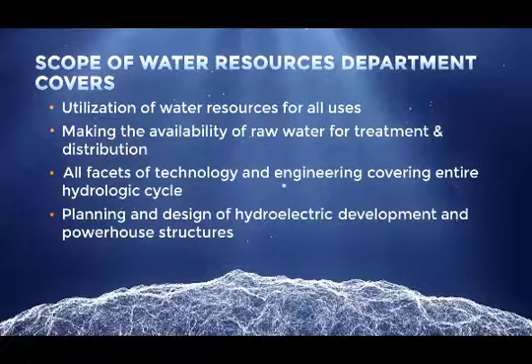Let's first hear from Mr. R.K. Jain, who is also holding the post of Chairman CWC. He will acquaint us with the importance of setting standards in this domain.

Standardization is very important for not only bringing uniformity in the procedures but also to have quality control. I congratulate BIS for striving hard in formulating the standards and covering almost all the aspects of the water resources.

It is very important for any country to have its own standards, particularly in the field of water resources, depending upon local geography and other local conditions.

Subject of water resources covers aspects like irrigation, drinking water, water for industrial use, planning and design of water resources projects, interstate issues, environmental issues, etc.

Standards are needed for wholesome and organized development of any nation and also to resolve conflicts.

There are 18 sectional committees in the Water Resources Division Council, WRDC in short. These committees are playing a vital role in this endeavor of BIS.

WRDC advises the new subject areas to be taken up for formulation of standards, keeping in view the national needs and priorities. It also advises on the matters relating to R&D needed for the establishment of the standards or their revision. Let us hear from a senior BIS official on how standards are developed and the overall working of the technical committees.

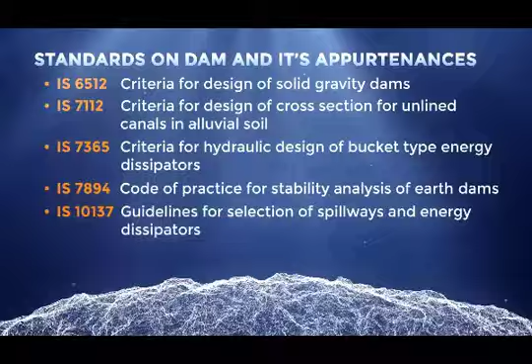Surface water resources is a big focus area. Within that, we work on dams and its appurtenances such as spillways, weirs, gates, etc. We also work on reservoirs, lakes and canals.

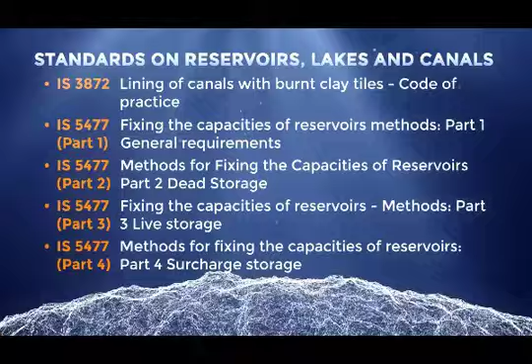Instrumentation of hydraulic structures and geological investigations. Another important category pertains to river training works, covering structures like embankments, groins, revetments, etc. Lastly, we deal with standards on management of water resources projects.

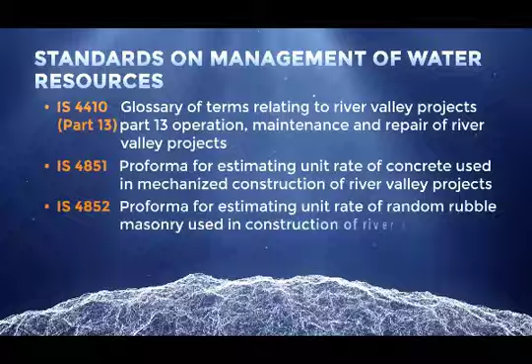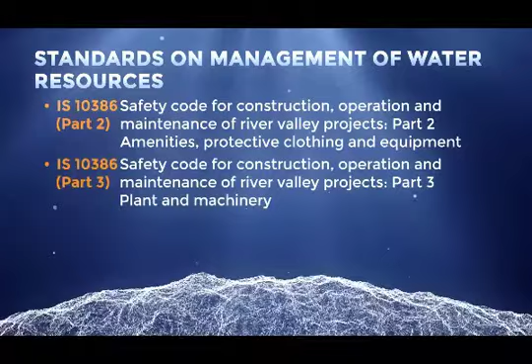Here we developed standards such as progress report and completion report of river valley projects. We also formulate safety codes in construction, operation and maintenance of river valley projects. Beyond this, we also work on subjects such as estimating unit rate for civil works, etc.

Now that we know the functional aspects of how the technical committees operate, let's take a closer look at their areas of operation. Dams, barrages and weirs are man-made barrier structures built across a stream or a river that stops and regulates the flow of water in controlled fashion.

Indian standards ensure that dams built in India are safe, economical and durable and are fit and functional to serve the nation. Let's hear about this in detail from our expert.

Let's talk about the Indian standards for dams and canals in our country. IS 6512 - this is one of the important standards which gives the design criteria for any solid gravity dam. Design analysis is a crucial part for any dam before its construction.

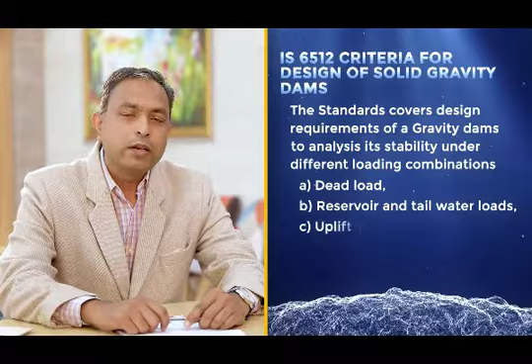We understand that this stability analysis takes into account the several critical load combinations. The standard gives 7 different load combinations for it. They are mainly the dead load, reservoir and tailwater loads, uplift pressure, earthquake forces, earth and silt pressure, ice pressure, wind pressure, wave pressure and thermal loads.

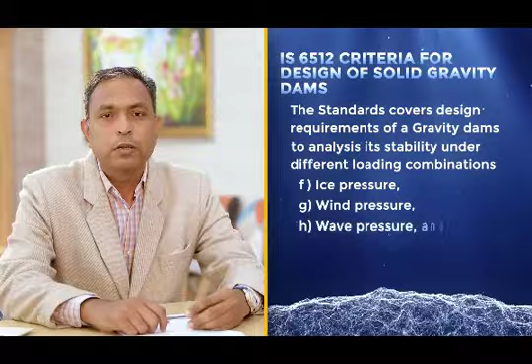We have one more important standard, IS 11855. This is design and use of rubber seals for hydraulic gates. This standard gives the recommendations. The standard covers 6 different types of seals depending upon their shapes, namely angle-shaped seal, flat seal, music note seal, double caisson seals, double bulb seals and corner seals.

It also lays out 6 important parameters to control the quality checks, comprising of tensile and elongation test, shore hardness test, water absorption, weather impact test and its materials.

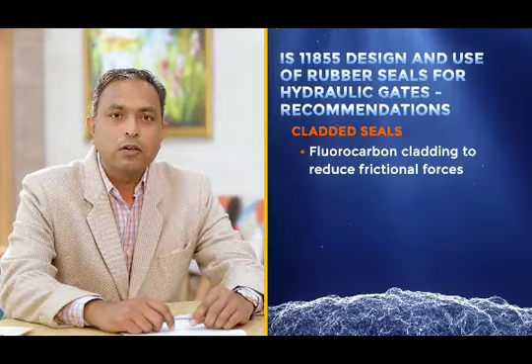The standard also covers an important requirement of cladded seals. The cladded seals use fluorocarbon cladding to reduce frictional forces. The standard also gives the test requirements of adhesion test.

Dams also need to have certain appurtenant structures to enable them to discharge their operational functions safely and effectively. A number of standards are in place to ensure this.

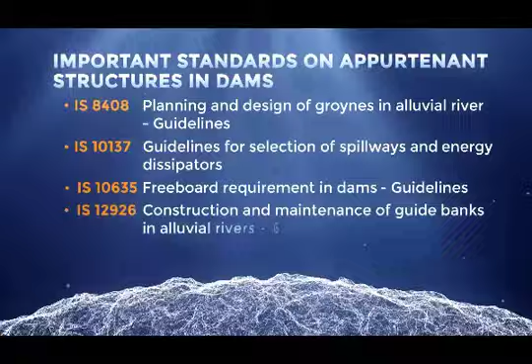For instance, this is a spillway. Spillways are passages for letting out water safely when the reservoir overflows. IS 5186 and IS 6934 cover the design criteria for different types of spillways.

Dam as a structure is not alone; we have many more standards on appurtenant structures. IS 11527 is a standard that deals with the structural design of energy dissipators for spillways. Energy dissipators are important structures to protect against erosion on the downstream part of any dam or spillway.

The design of downstream protection works, or energy dissipators below hydraulic structures, occupies a vital place in the design and construction of dams, barrages and outlets. The standard covers hydraulic jump type, stilling basin and bucket type energy dissipators below spillways and outlet works founded on rock.

In the standard, the structural design of floor slabs consists of the following steps: determination of uplift forces, details of anchorages into bedrock—that is, diameter, number and spacing of anchor bars—determination of the length considering dislodgement of rock mass against uplift force, and working out details of slab reinforcement.

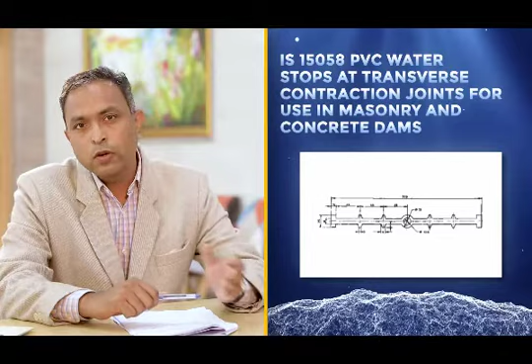IS 15058 is another standard, on PVC water stops. These water stops are used at transverse contraction joints for use in masonry and concrete dams. The contraction joints in masonry and concrete dams provide passage through the dam which, unless sealed, would permit leakage from the reservoir to the downstream face, and this could be harmful to the structure.

To check this leakage, water stops are installed in the joints adjacent to the upstream face. The standard takes care of the quality of this product and covers 12 different parameters to check the quality, from material, aging, weather impact, weight, water absorption and its dimensions. The standard is BIS certifiable, and presently we have 6 BIS licenses against this standard.

Water release from dams may also be controlled using gates and shutters. The Bureau of Indian Standards Code IS 13623, criteria for choice of gates and hoists, provides the basic classification of gates. IS 5620 gives recommendations for structural design criteria for low-head slide gates.

BIS has developed a vast array of Indian standards for planning, design, construction and maintenance of various types of dams and their components. Before we move on to the next category, let's take a brief look at some key standards within this area.

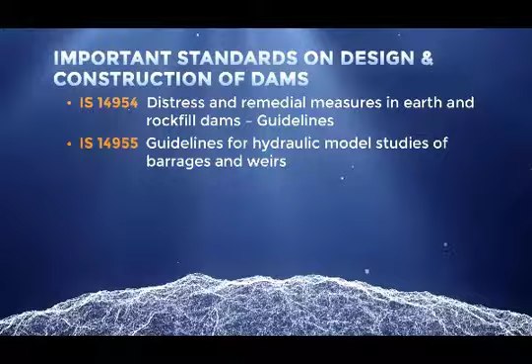Now, for our next subcategory under surface water, is reservoirs and lakes. A reservoir is a man-made lake that is created when a dam is built on a river. They are different from natural lakes. River water gets blocked by dams and is collected behind the dam, creating a reservoir.

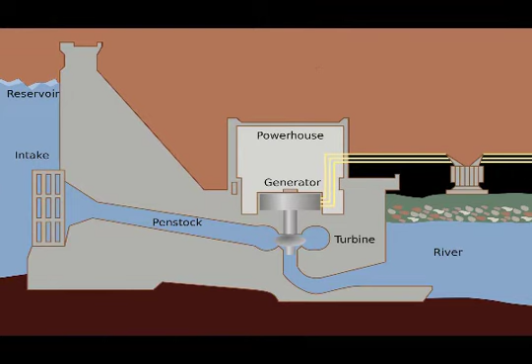We already know reservoirs are used to generate hydropower. They also have a host of other benefits. First, during seasonal high flow of rivers, they limit the amount of water allowed to continue downstream. Through this, reservoirs help control flooding.

Secondly, during dry seasons, water is released from the reservoir through canals. This enables farmers to water their crops and industries to function without interruption.

Do you know what's the most common problem with reservoirs? You might not want to believe it, but it's as simple as evaporation. A huge quantity of water is lost from reservoirs through evaporation. However, a substantial quantity of water can be conserved by controlling this evaporation.

We have a standard, IS 14654, minimizing evaporation losses from reservoirs, which stipulates the methods and guidelines for reduction of evaporation losses from water bodies, with special reference to control of evaporation with chemical retardants. IS 6939 is another standard that provides methods for determination of evaporation from reservoirs.

The BIS standard also covers other measures available for control of evaporation, like the installation of floating solar panels on the reservoir. If you go to any reservoir or even a natural lake, you will observe that the water there is very still. Due to this, bits of sand, rock, dirt and other material called sediment sink to the bottom, leaving the water quite clear.

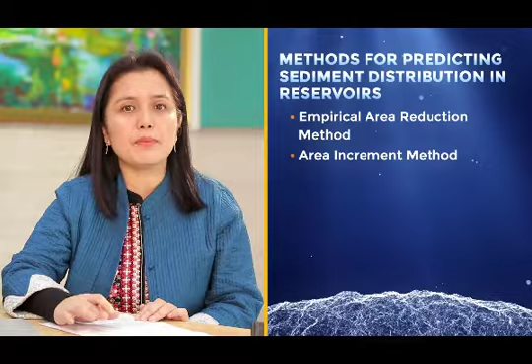The sediment entering a storage reservoir gets deposited progressively with the passage of time. This causes the bed level near the dam to rise and reduces the capacity of the reservoir. Several methods are in use for predicting sediment distribution in reservoirs for design purposes. Either the empirical area reduction method or the area increment method may be used. IS 5477 Part 2 lays down methods for computing the sediment yield and for predicting the probable sediment distribution in the reservoir. Let's hear about this in detail from our expert.

IIT Roorkee, since its earlier version as University of Roorkee, has been involved in the planning, design and construction related activities of major water resources projects such as Bhakra Dam, Hirakud Dam and Tehri Dam in the country. Research inputs from academic and research institutions are appropriately incorporated in the Indian standards and guidelines prepared by Bureau of Indian Standards, and are at par with international standards. Government of India has focused on river rejuvenation, water conservation and water reuse. Thus, there is a need of revisiting the existing standards and introducing new standards to meet such requirements for the health of existing water bodies and availability of safe water.

Water from reservoirs and barrages is released through canals, which have an important role to play in India's rural economy. This released water is further utilized for irrigation in far-flung areas. BIS has developed the standard IS 6531, which gives design requirements for canal head regulators. IS 9447 gives guidelines for assessment of seepage losses in canals. IS 4701 is a standard for earthwork on canals. Standards have also been framed to address various kinds of seepage losses in canals through various types of surface lining such as stone pitching, concrete slabs and tiles, burnt clay tiles, bitumen lining and polyethylene films. Here is a list of some important standards.

Let's hear about this in detail from our expert. We have another important part of our water resource sector: canals. Canals are the major source of irrigation in our country. Apart from design, layout and planning of canals, a number of standards have been framed on lining of canals. Let's talk about a few of them.

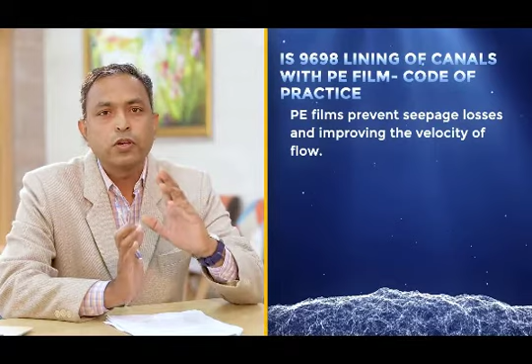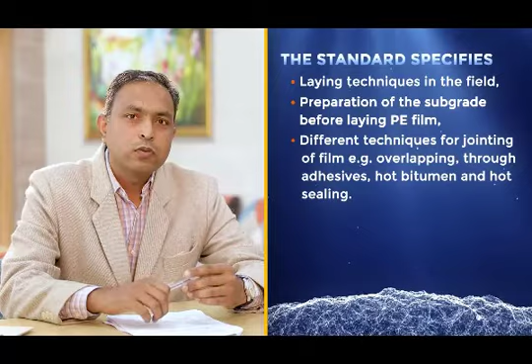IS 9698 is one of the important standards which gives lining of canals with PE films, that is polyethylene films. The standard lays down the practice for use of PE film as canal lining, preventing seepage losses and improving the velocity of flow. The standard covers both the low density type and high density type PE films according to the requirements of IS 2508 and IS 10889. The standard specifies laying techniques in the field, preparation of the subgrade before laying the PE film, and different techniques for jointing of films, for example overlapping through adhesive, hot bitumen and hot sealing. It also guides us with do's and don'ts in the use of this PE film as canal lining.

We have one more important standard, IS 10646. This standard deals with canal lining of cement concrete tiles and is BIS certifiable for cement concrete tiles as canal lining. It gives material requirements for tiles, with reference to the use of different cement and requirements for aggregates conforming to IS 383. The standard specifies the dimensions of tiles and gives the test to check the quality of tiles through its flexure test. The flexure test gives the minimum breaking load requirement from 18 to 41 kg for different thicknesses.

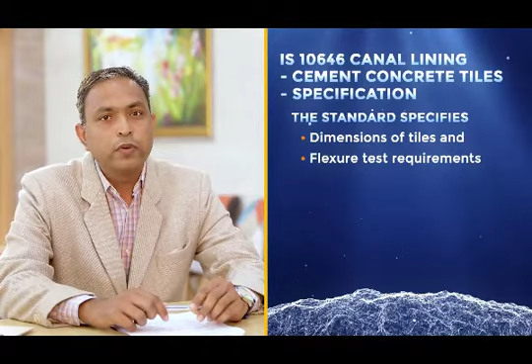Now for hydrometry, another emerging and critical area. BIS has also developed a number of standards in this domain in terms of measurement of liquid flow and discharge in open channels and closed conduits by various methods. Here is a list of some important standards.

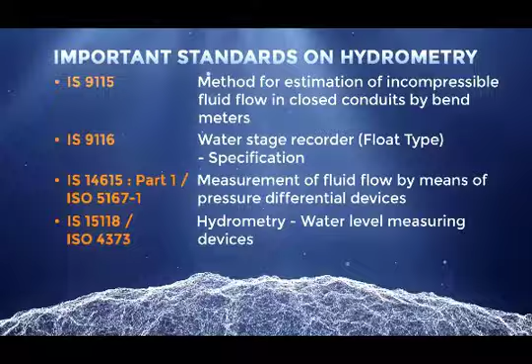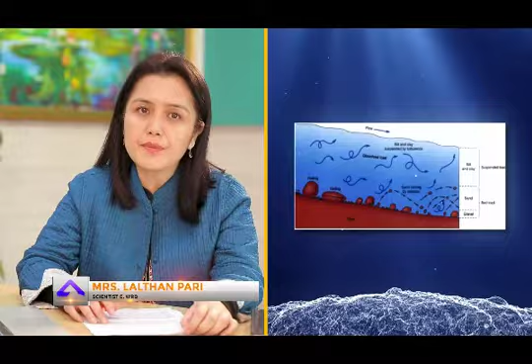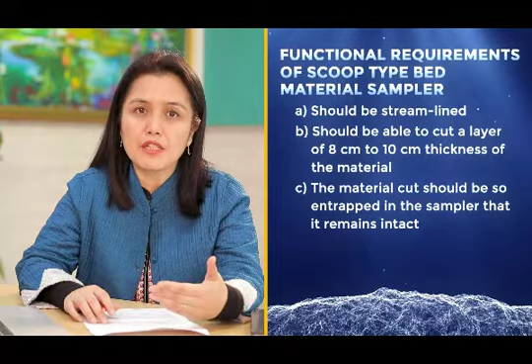Insoluble materials like silt, sand and gravel transported by streams create problems in the operation of many river valley projects. Therefore, to have adequate knowledge of the movement of sediments, systematic sampling of sediment is required. IS 3917, scoop type bed material samplers, is a standard that specifies functional requirements like the sampler should be able to cut a layer of 8 cm to 10 cm thickness. It also specifies performance test requirements and materials to be used for the manufacture of various parts of the sampler. Other important standards under hydrometry include IS 16571, measurement of liquid flow in open channels.

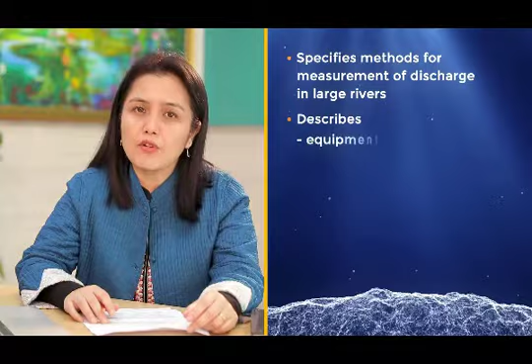This standard specifies methods for measurement of discharge in large rivers using the moving boat method. The standard describes equipment requirements, selection of site, method of computation, and also contains a step-by-step example computation by the moving boat method.

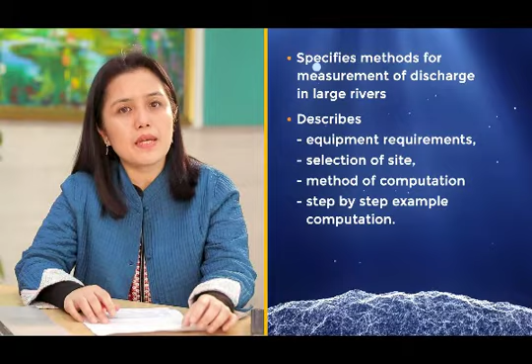IS 16138 is a standard which gives guidelines for the design, selection, and use of electromagnetic current meters for measurement of liquid velocity in open channels.

BIS has also taken an active role in the ISO committees in the field of hydrometry. Let's get more clarity on this subject matter from our expert.

BIS is working in close liaison with ISO in the area of standardization on hydrometry. BIS holds the secretariat of the committee ISO TC 113 on hydrometry and its subcommittees SC1 velocity area methods and SC6 sediment transport since the inception of the committee in the year 1964. Indian experts actively contribute in the formulation of ISO standards on hydrometry and hold prominent leadership positions such as chair, convener, and project leaders. BIS has adopted many ISO standards on hydrometry to align with the latest technologies as well.

Currently, India is going through a severe groundwater crisis. This is largely due to severe over-extraction and groundwater contamination, covering nearly 60% of all districts in India. Besides, recharge of groundwater is slow as a large quantity of surface runoff gets washed to rivers and oceans.

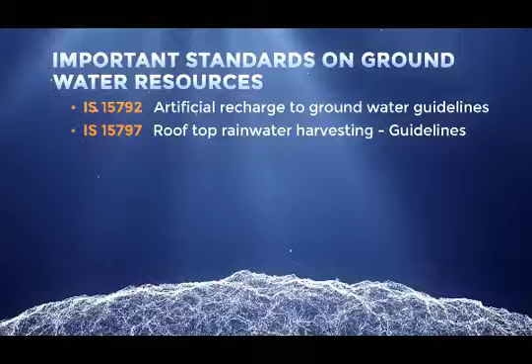Excessive use of groundwater for various applications has resulted in lowering of groundwater levels, causing adverse environmental impacts. Artificial recharge to groundwater refers to augmentation of groundwater resources using surplus surface water available. In this regard, there is a standard IS 15792, Artificial Recharge to Groundwater, that provides various techniques and methods of artificial recharge by modifying the natural movement of the surface water.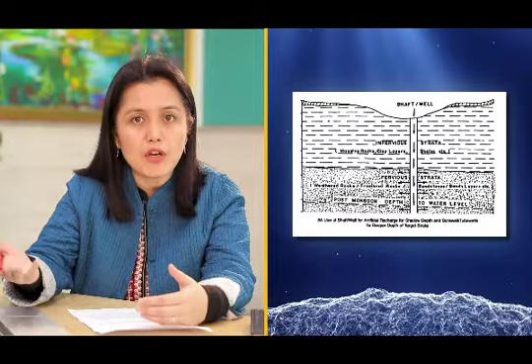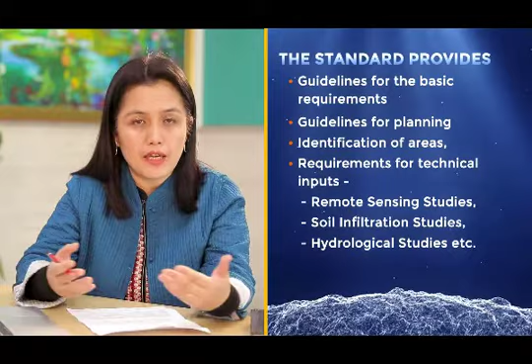The standard provides guidelines for the basic requirements for artificial recharge projects and its planning, such as identification of the areas, requirements for technical inputs like remote sensing studies, soil infiltration studies, hydrological studies, etc.

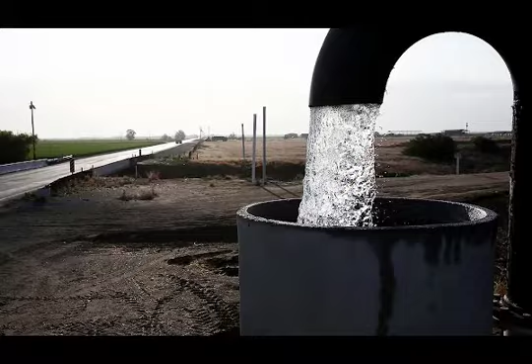In terms of groundwater resources, there are many other important areas where BIS has developed standards, like IS 15797, guidelines for rooftop rainwater harvesting, and IS 15897, which provides the specifics of surface geophysical surveys for hydrogeological studies. For a detailed list, please check the program of work under WRD 3, Groundwater and Related Investigations Sectional Committee.

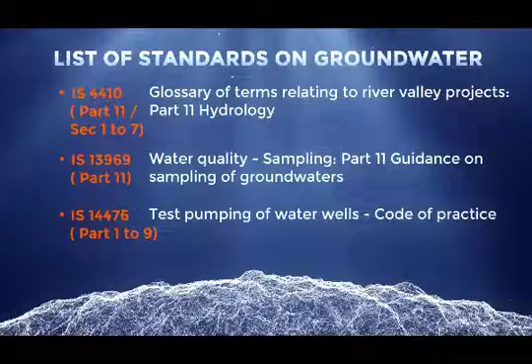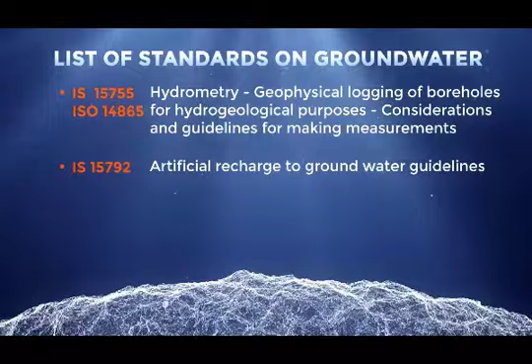India is the largest user of groundwater in the world. About one-fourth of the global groundwater withdrawal occurs in India. Hence, there is a dire necessity to standardize the methods and procedures for survey, assessment, monitoring, and management of groundwater.

Standards provide technical specifications, enabling guidelines, and precise criteria for the activities. Standards also help to reduce errors, facilitate problem solving, and increase the reliability and effectiveness of outputs. Standards in some aspects of groundwater like geophysics, artificial recharge, and groundwater measurement have already been developed by BIS.

A few new subjects have also been taken up for standardization. Just to mention a few: guidelines for aquifer mapping, mathematical modeling of groundwater, impact assessment techniques for artificial recharge schemes, interaction of groundwater and surface water assessment, guidelines for surface runoff harvesting using small structures. These standards will help in a long way to achieve the desired results in the groundwater sector.

Evidently, these water resources projects demand meticulous planning before execution. This is to make sure that adverse impacts do not outweigh the benefits expected from the projects.

To address this, BIS has developed standards IS 15845 and IS 15442 for environment management plan and parameters for environmental impact assessment of water resource projects. Here is the list of some important standards.

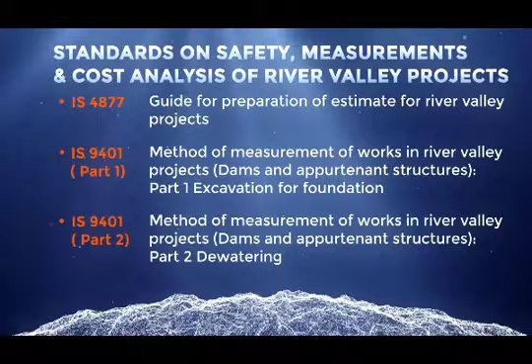Outbreak of fire in river valley projects can cause extensive damages to the buildings and equipment. For this, we have IS 10386, Construction, Operation and Maintenance of River Valley Projects, Part 7, Fire Safety Aspects. This standard lays down the fire safety requirements in river valley projects. The standard is intended to be of use during the construction, operation as well as maintenance periods for the fire safety of river valley projects.

It covers fire safety aspects of dams, canals, tunnels, etc., buildings, forest, hydropower stations and their allied equipment.

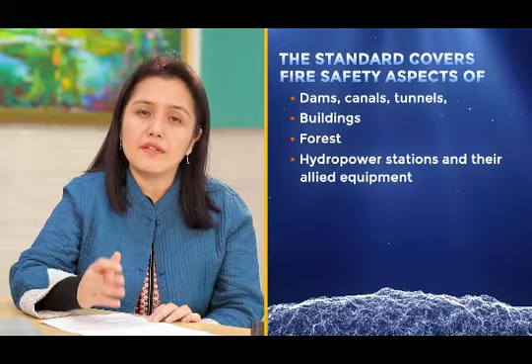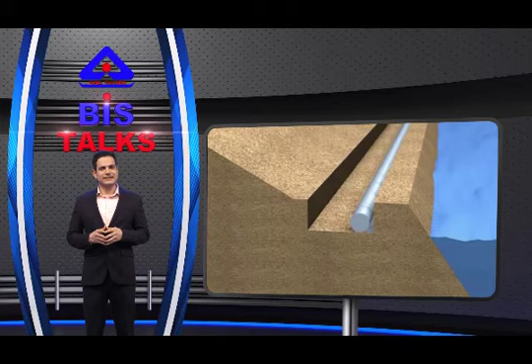We need to talk about another important category, that of river training works. This involves structures constructed around the river to guide the flow of water, prevent erosion, protect the embankment and stabilize the structures. Guide banks are protective or training embankments constructed at the side of a weir, bridge, etc. to guide the river through the waterway provided in the structure.

What you see now is groins. Their purpose is to interrupt water flow and to limit the movement of sediment from shore to sea. Likewise, there are other structures like levees, fish pass and revetment.

We understand that flood is another important aspect in the water resource sector. BIS also caters to the problem of floods in rivers through its sectional committee WRD 22, that is flood management, erosion management and diversion works. Let's talk about one of the standards, IS 13877, that is planning and design of fish passes.

The standard covers the details for location, planning, design of fish pass construction in barrages or diversion structures. While investigating and planning the fish passes, the standard helps in identification and collection of data like types of fish, its normal swimming speed, locations, amount of fish, minimum water requirements, etc.

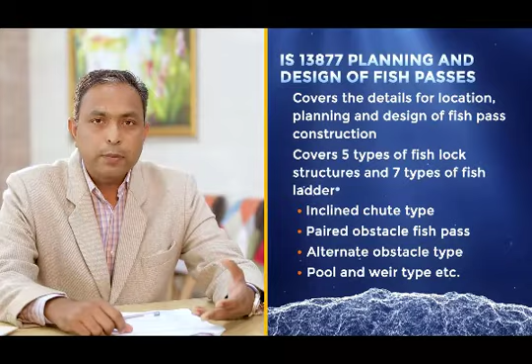The standard covers 5 different types of fish lock structures and 7 types of fish ladder constructions. For example, inclined chute type, paired obstacle fish pass, alternate obstacle type, pool and weir type, etc. The standard also covers the selection criteria.

BIS has also framed one of the important standards for estimating flood damages, IS 13739. The standard gives the guidelines for estimation of flood damages. It is one of the significant standards to provide scientific procedure for collection of data and methods to convert the direct and indirect losses other than human life into monetary terms.

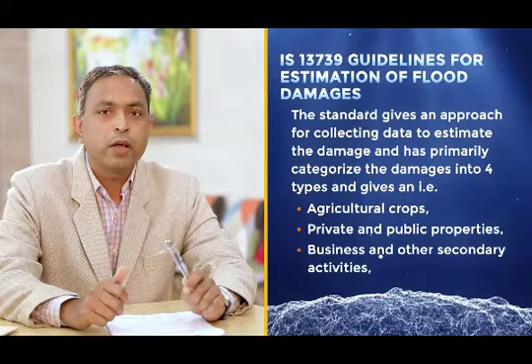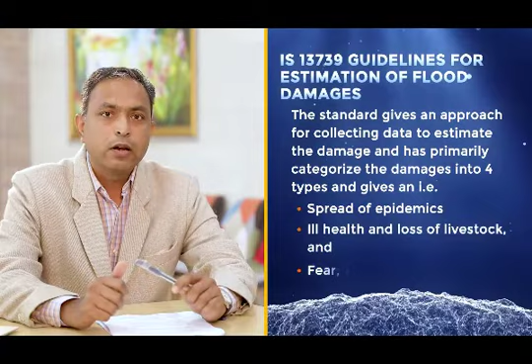The standard gives an approach for collecting data to estimate the damage and has primarily categorized these kinds of damages into 4 types: agricultural crops; private and public properties; business and other secondary activities; spread of epidemic, health and loss of livestock; and fear, anxiety and distress.

As we have seen, the Water Resources Department has brought out standards covering every aspect of water resource management, from planning to design, construction and maintenance of river valley projects, in subjects ranging from hydrometry to geological investigations, river protection, construction safety, environmental impact assessment and flood control.

To address the various emerging challenges and keeping in view the latest technological developments, BIS is striving to frame standards on areas which are need of the hour. We are considering development of standards to prolong the life of dams by addressing silt control and silt removal techniques. It is one of the major areas of concern today.

To regulate the distribution of water as per need, our committees are working on piped irrigation networks, specifying the process, testing and material quality. We are also working on new cost-effective areas like CFRD dams, piano key weirs, roller compacted RCC dams, etc.

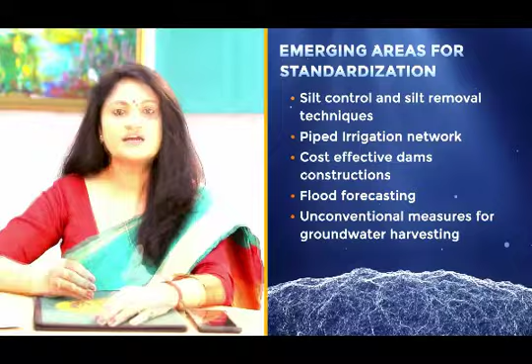Considering the immense damage caused by floods, subjects like flood forecasting, real-time reservoir inflow forecasting with neural algorithms and other computational techniques are being considered.

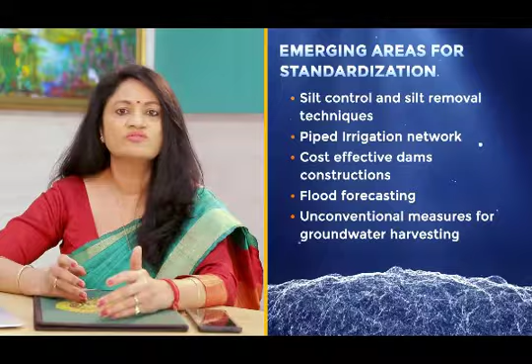To conserve our dwindling groundwater resources, our committees are working on standardization of unconventional measures for groundwater harvesting, and standardization in the field of performance monitoring of hydraulic structures to increase construction life and cost-effective maintenance, as well as to improve the efficiency of water use, is another important area being looked into.

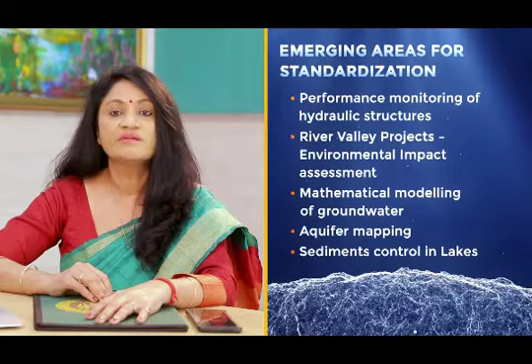Another area under consideration is environmental impact assessment of river valley projects. Besides, BIS is committed to continuously revising existing standards to incorporate the latest technological advancements and ensure that Indian standards are at par with international standards.